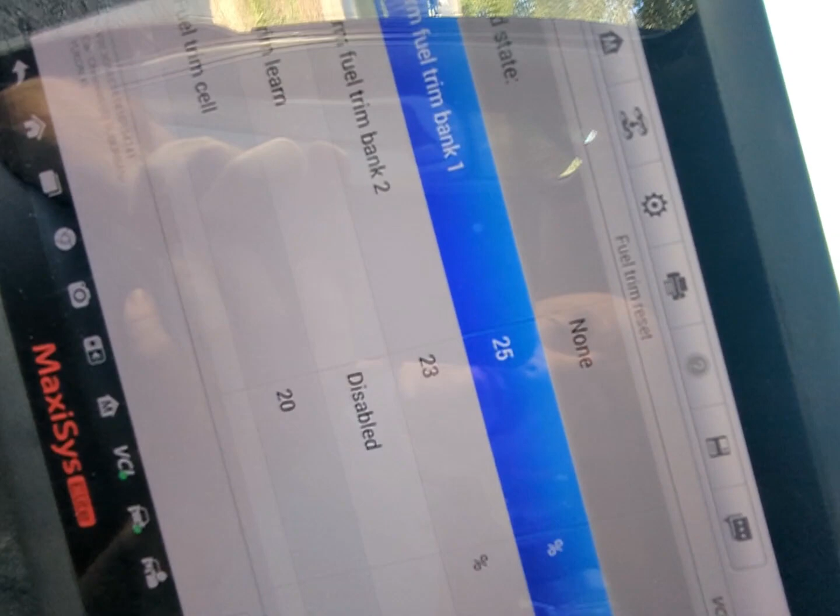Enjoy. All right, I'm going to try to reset the fuel trims on this bad boy. The ALDL doesn't crap out on me—the assembly line data link is messed up on here, so we're going to reset this.

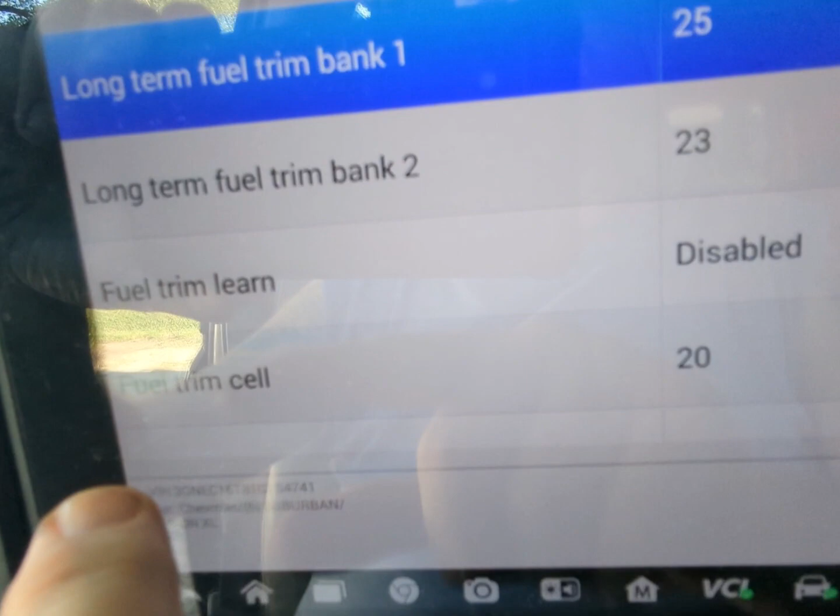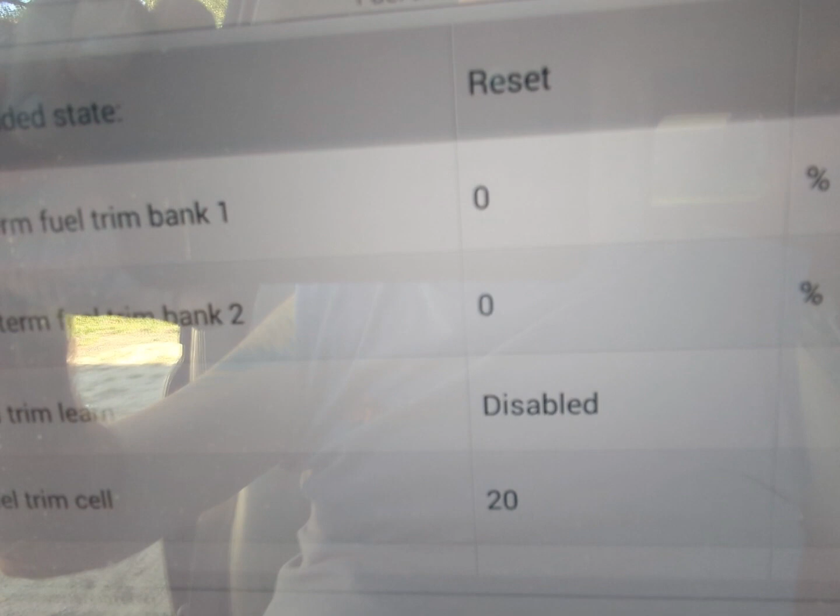Our goal is to try to get these long-term fuel trims back down. Both of these long-term fuel trims, we want to get these to 0. We're going to reset them and set these two back to 0. This is what we want to do. Okay, all right, they're at 0 now. Now we're going to escape.

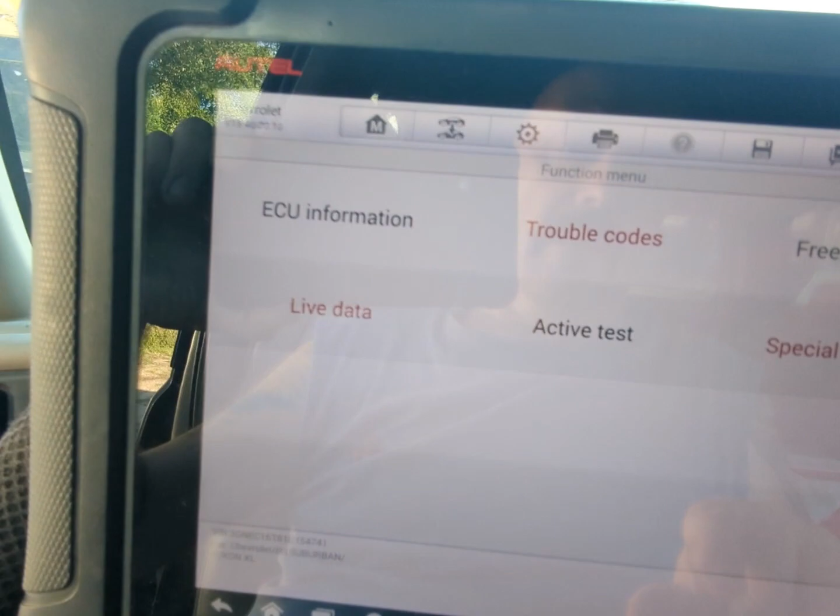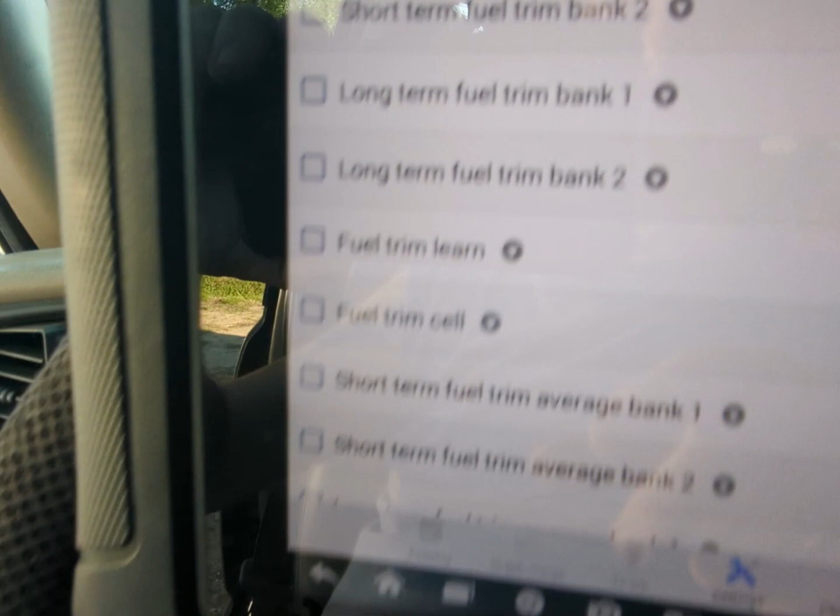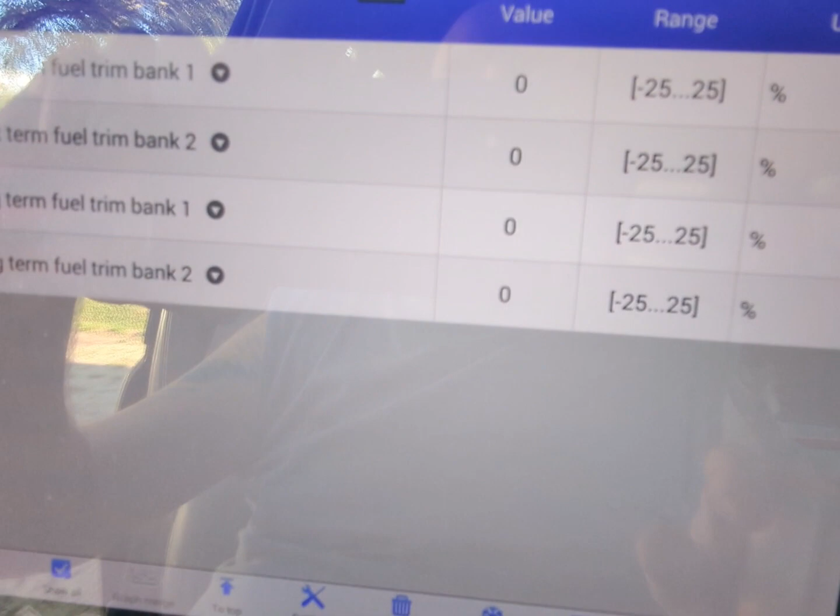Then we're going to take a look at the fuel trim. Let's just stay right here—live data, engine live data—and we're going to look at the fuel trim data. The car's not running, it's sitting here at engine run. Okay, all our fuel trims are set to 0. We're going to hit these trims here, and this is what we want to see. We want to see these fuel trims and watch what happens when we start the car.

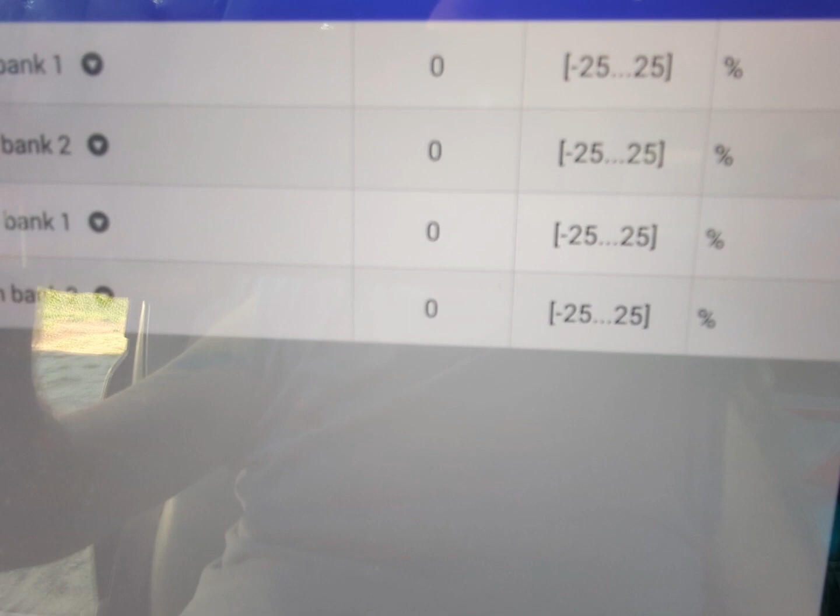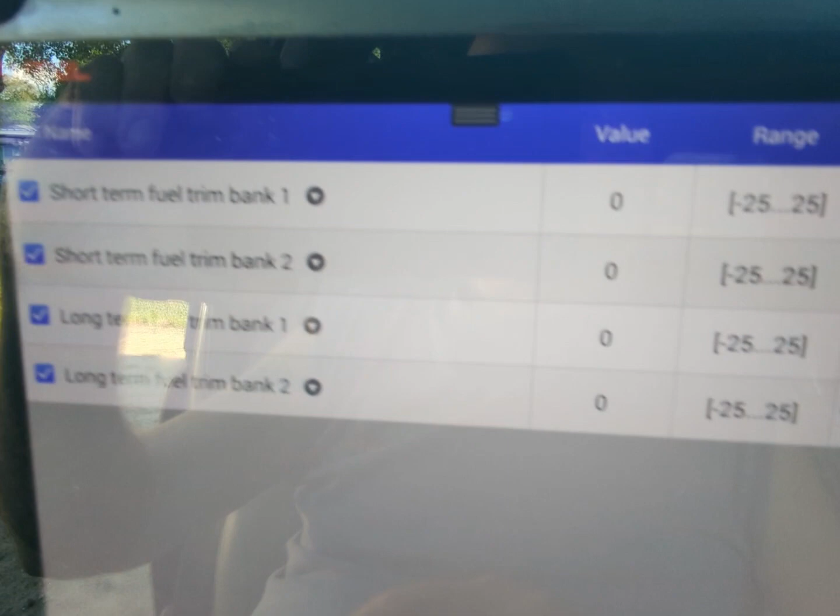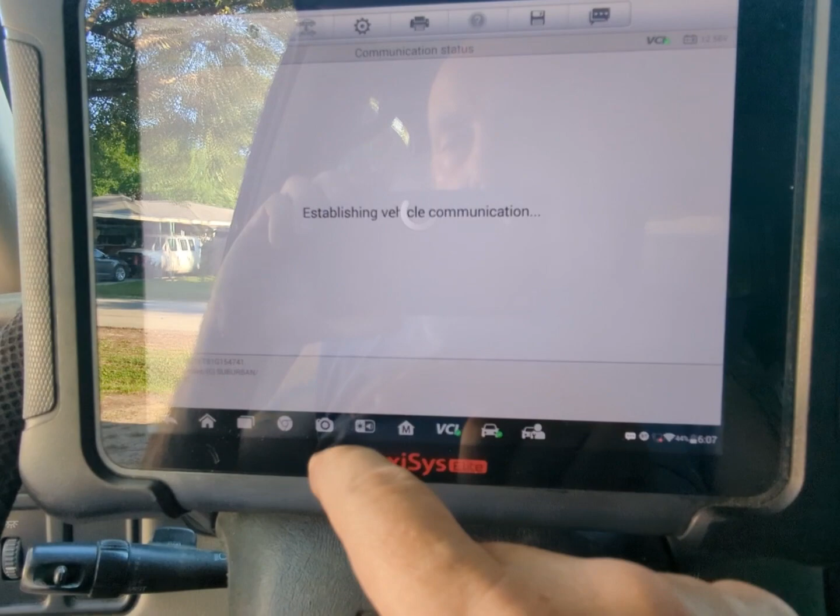So here we go, we're going to start it. Let's see what the fuel trims do. Hang on a second, I want to do something else here. I'm going to go back and see if I can look at the closed loop. Where is she? Fuel trim. These guys—I want to see if we can see a loop status.

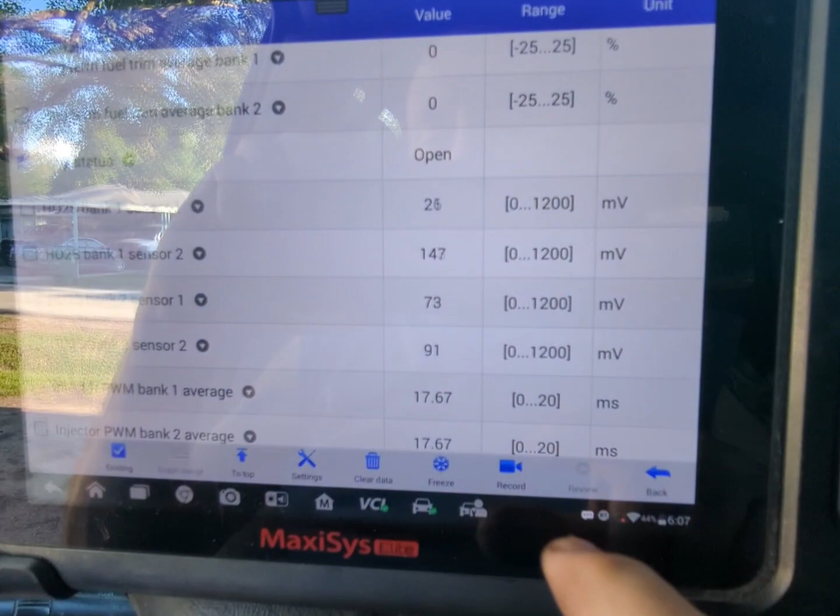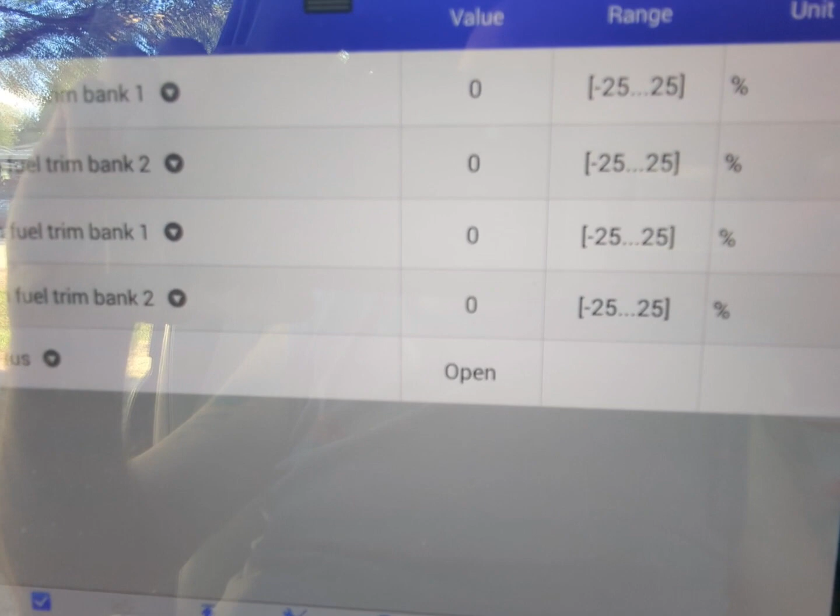Loop status is open. Now this is what we want to see—the loop status. Right now the engine's going to stay in open loop until the computer feels ready. Once she goes into closed loop, our fuel trim should take over. We're going to see if our long-term fuel trims start climbing again.

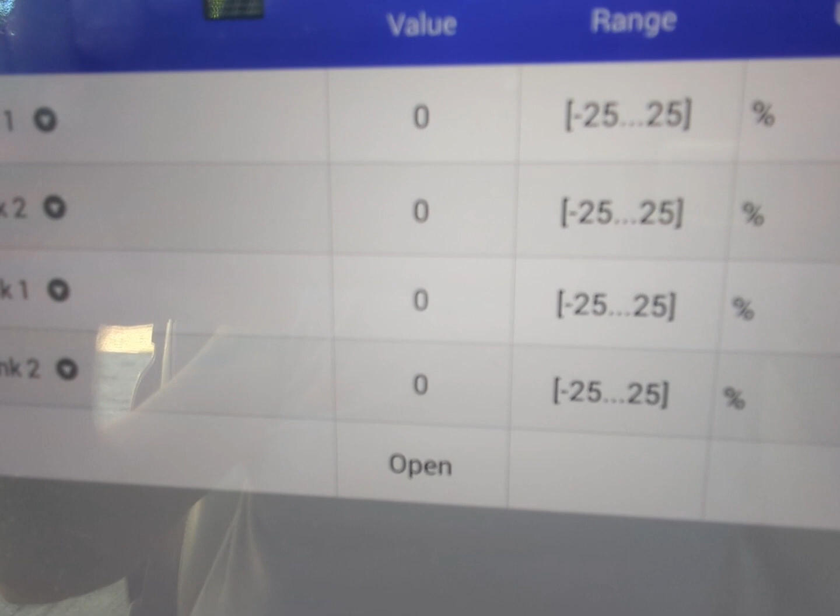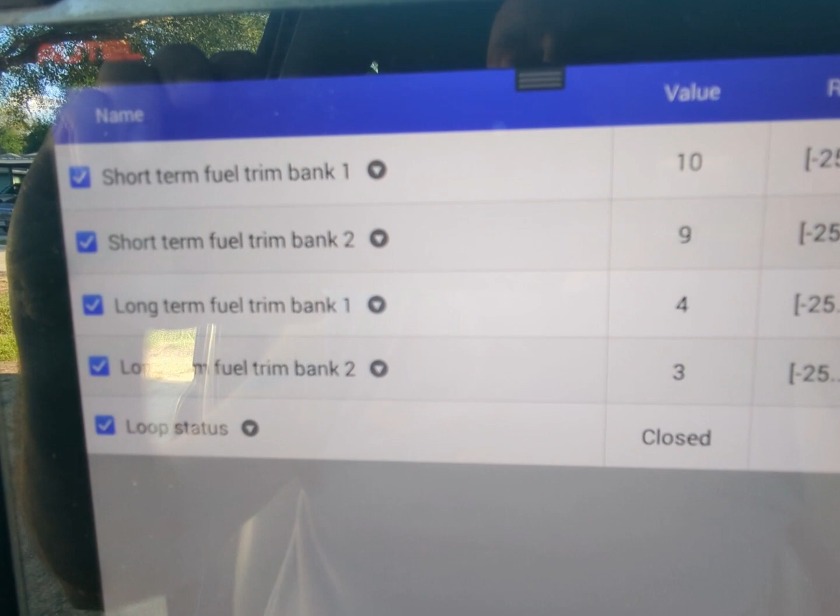Let me give a little gas. There, she's in closed loop. Let's see what our fuel trims start doing. These are our long-term fuel trims, the short terms on the top. Short terms are capping out, so long terms are compensating.

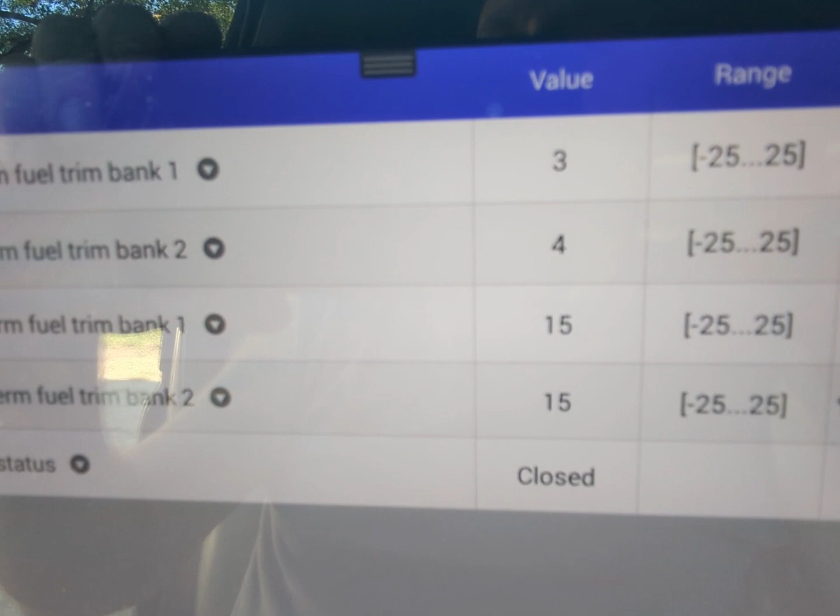Well, they're not capping out just yet, but long-term fuel trim is already starting to shoot up. So we've definitely got something convincing that these oxygen sensors are running lean. Let's see, we're at 15, 16, 17. We're going to cap out at 25 again.

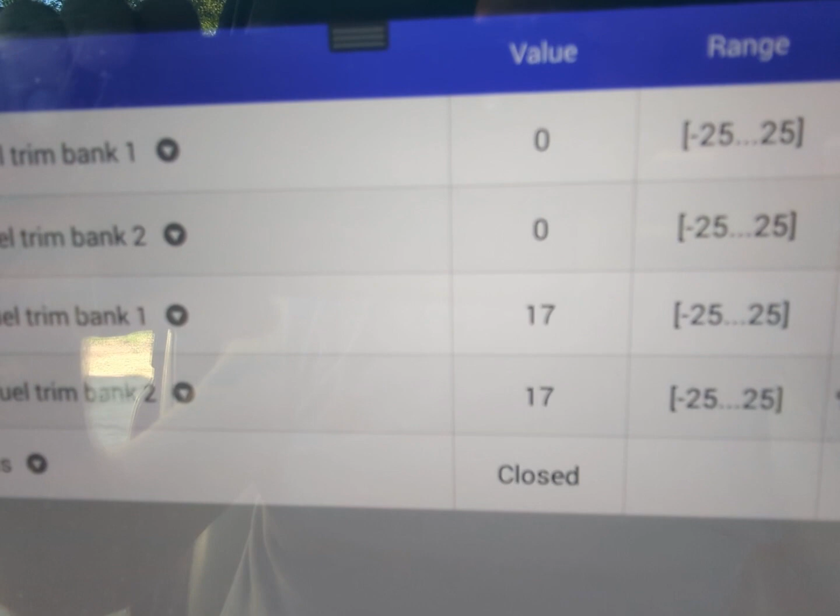Let's give it some gas. This is in closed loop. Fuel trims are trying to stabilize long term at 17. Okay, here we go, 21, 20. All right, boom, and we're going to cap out.

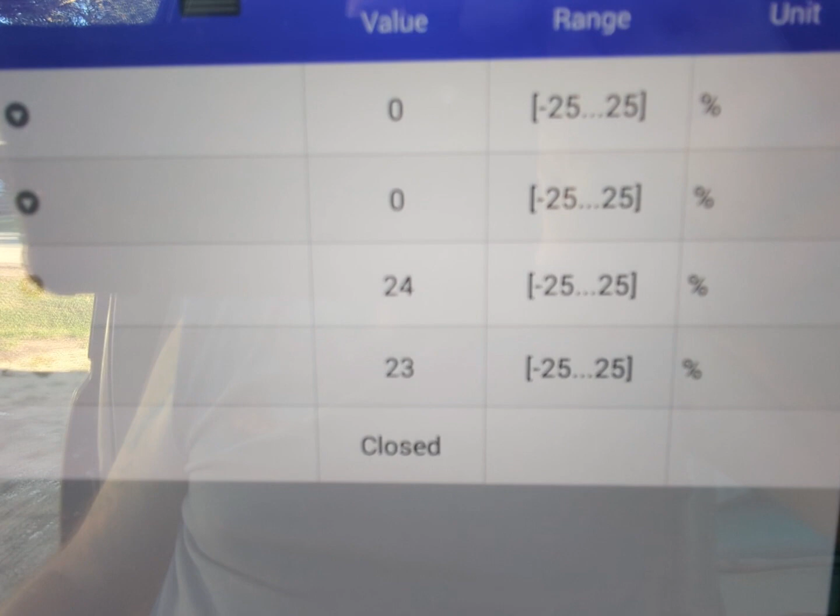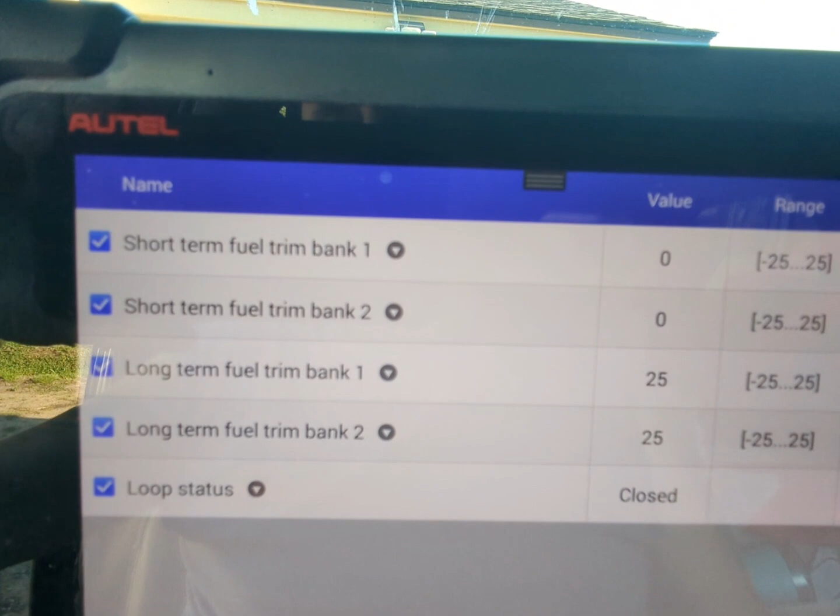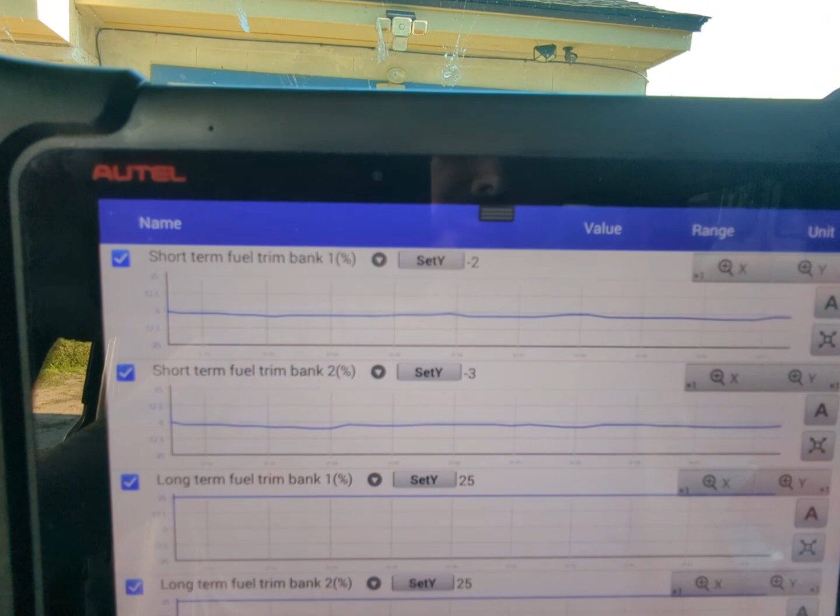I do hear an exhaust leak, so that may be contributing to these fuel trims going crazy here. Yeah, they're capped out already now, so we're gonna look at the graph. Just slow them down a little bit.

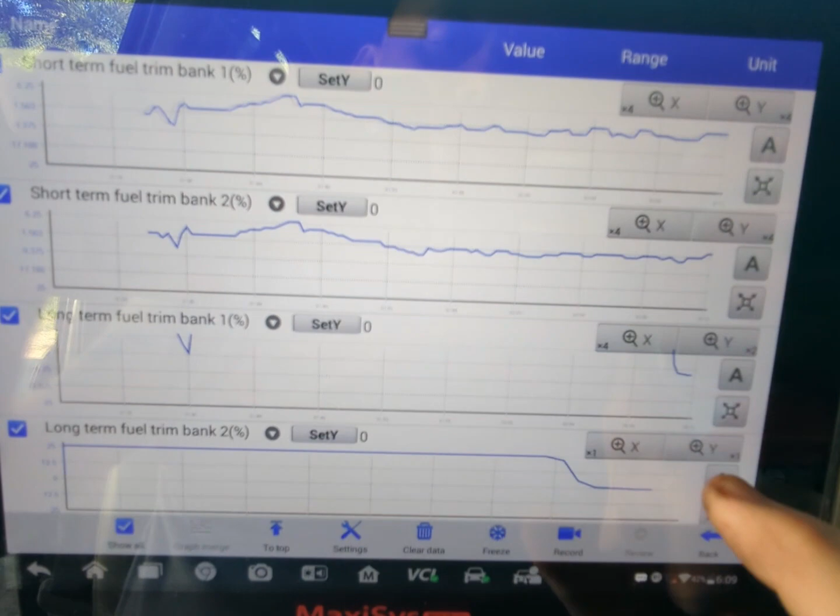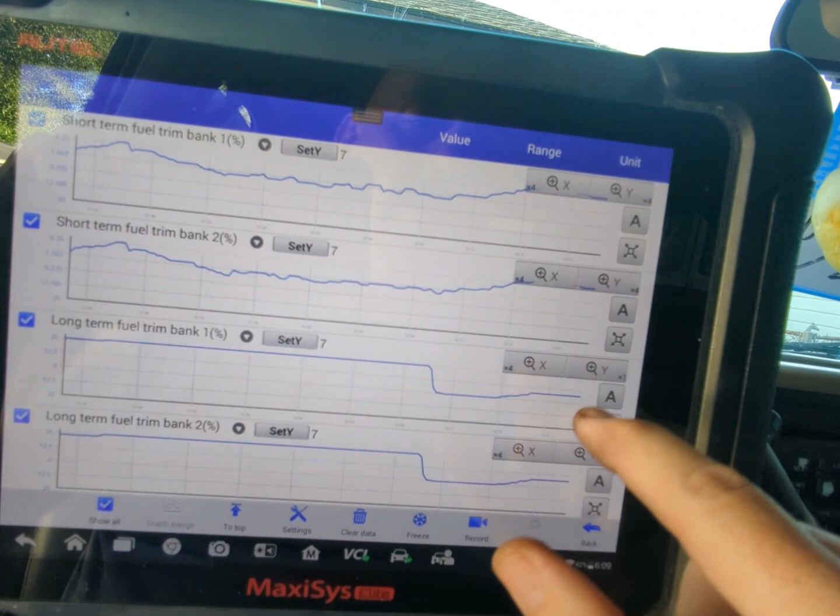Put this back. This must be long-term fuel trims. Okay, we're looking at long-term fuel trims at 10, 11. Short terms are trying to climb. Let's reduce these back.

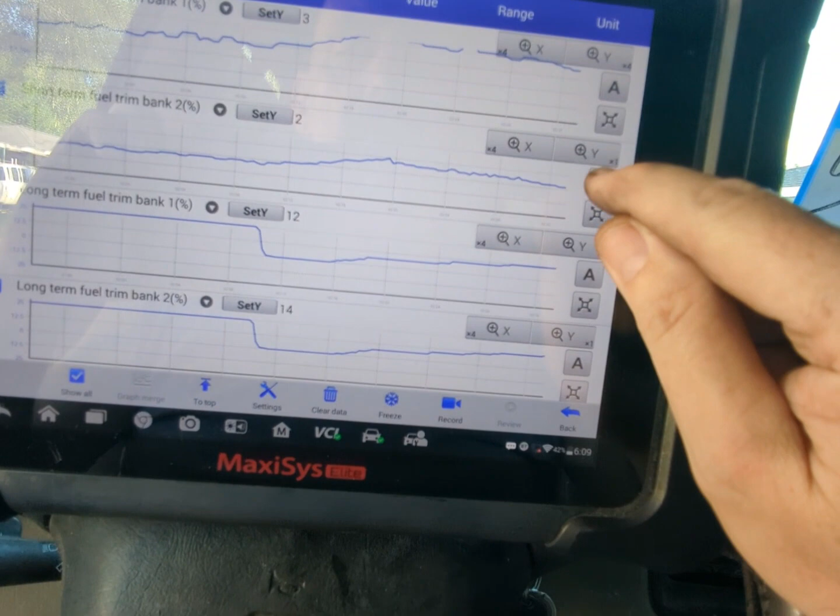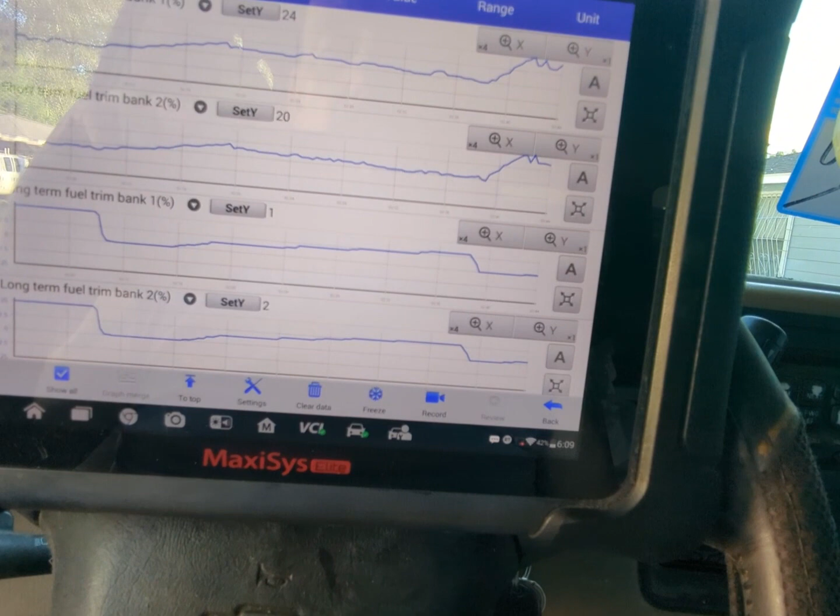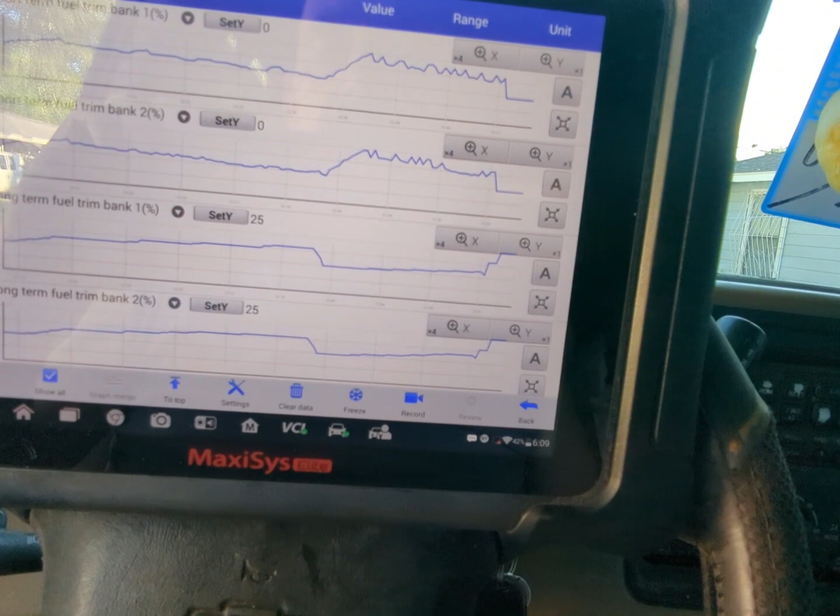Now long terms are at 0. I'm thinking this may be a mass airflow issue. And they cap out when we go back to idle. Let's see if we can take a look at the mass airflow real quick.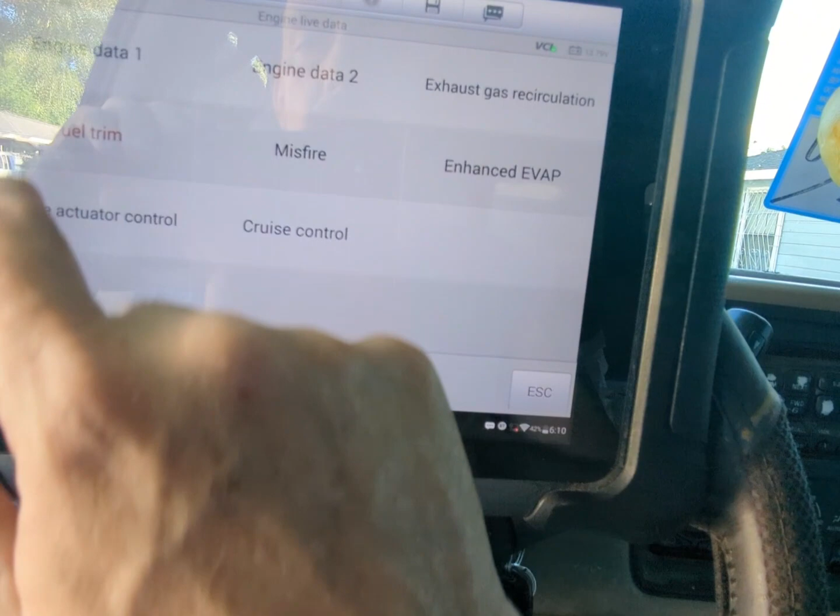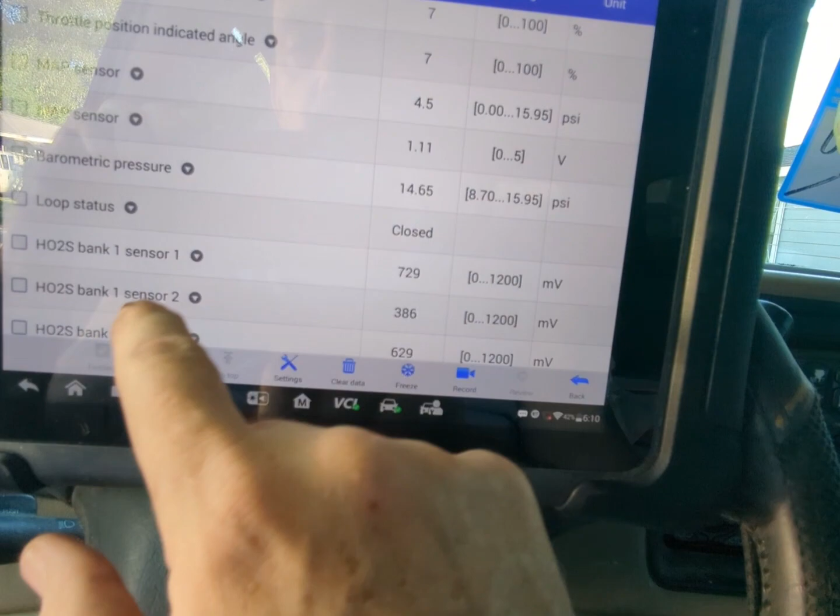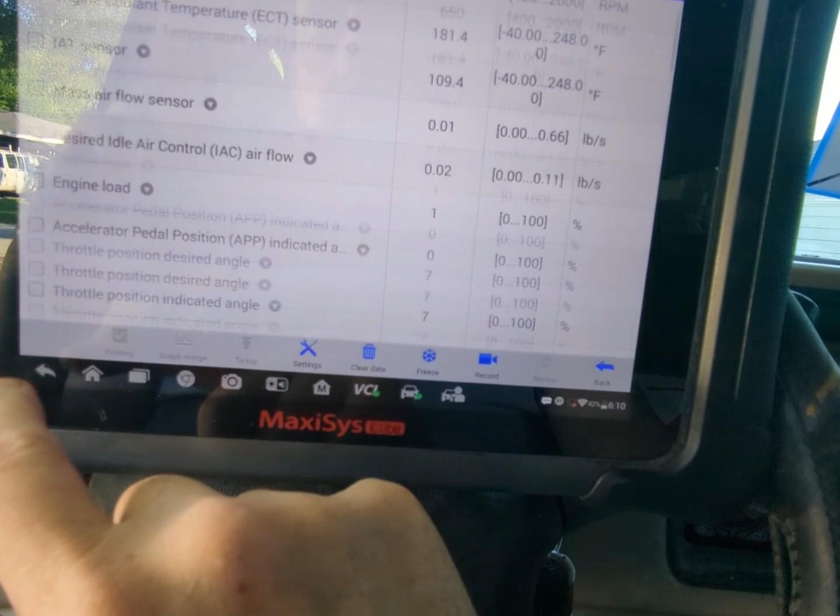Let's look at engine data. Engine data 1, so we can find mass airflow on here. Let's see, we got MAP. Okay, so let's go look at engine data 2.

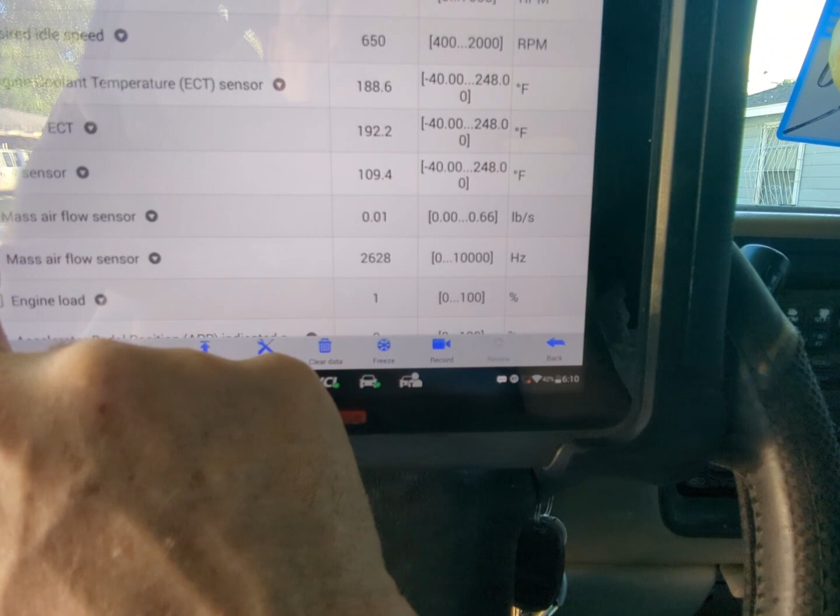Started, and there we go, mass airflow. Well, there's one issue right there. Mass airflow should be, for measuring, let's measure these in grams. That'll be better.

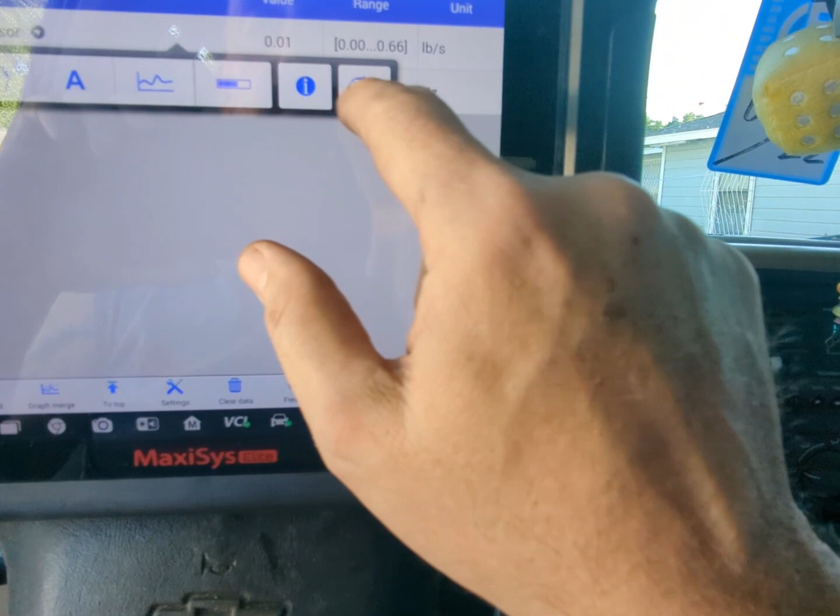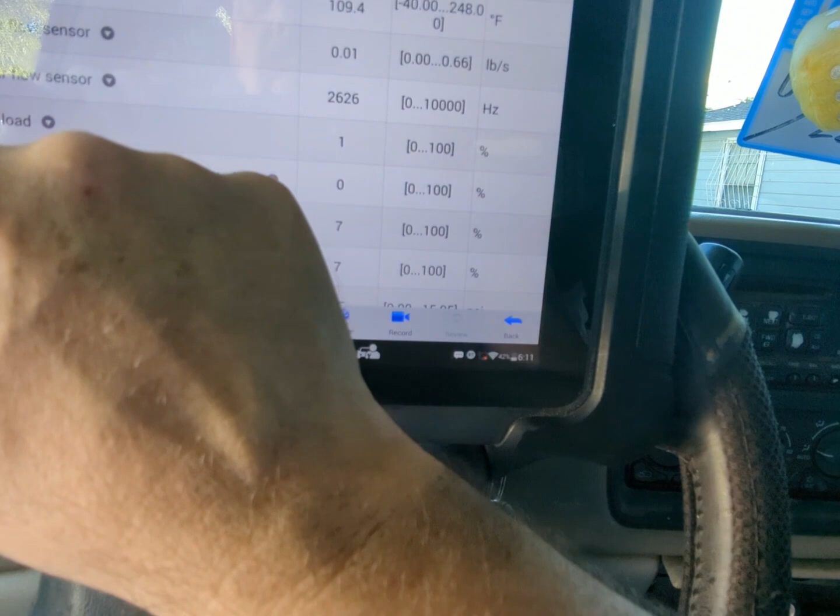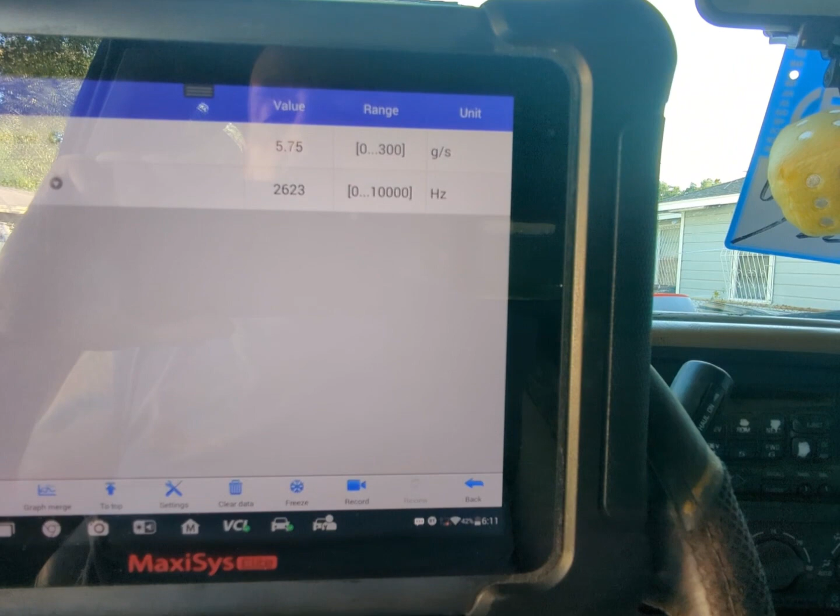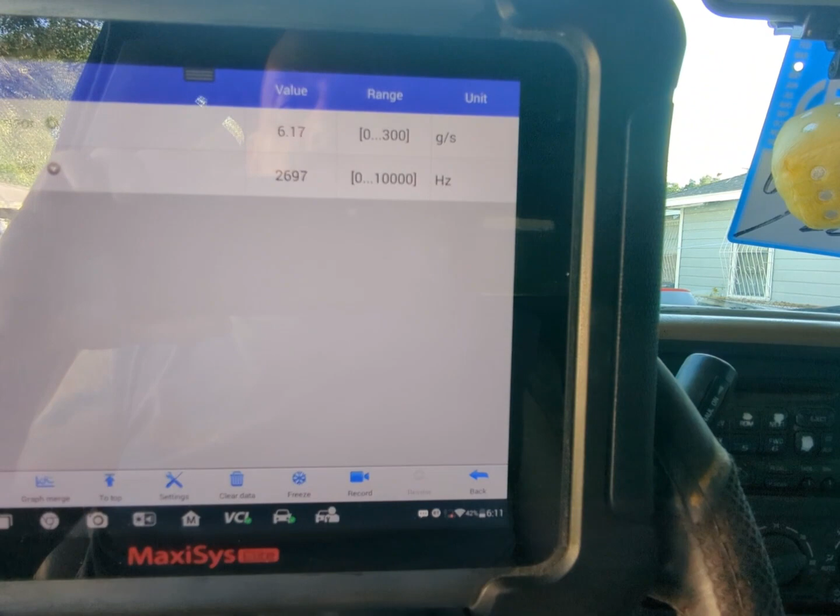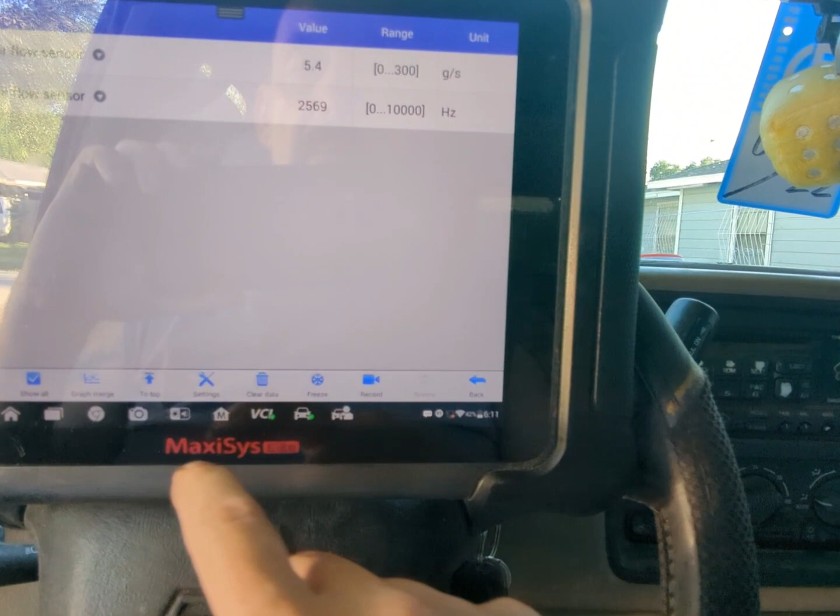Okay, let's go back. Back. Okay, great.

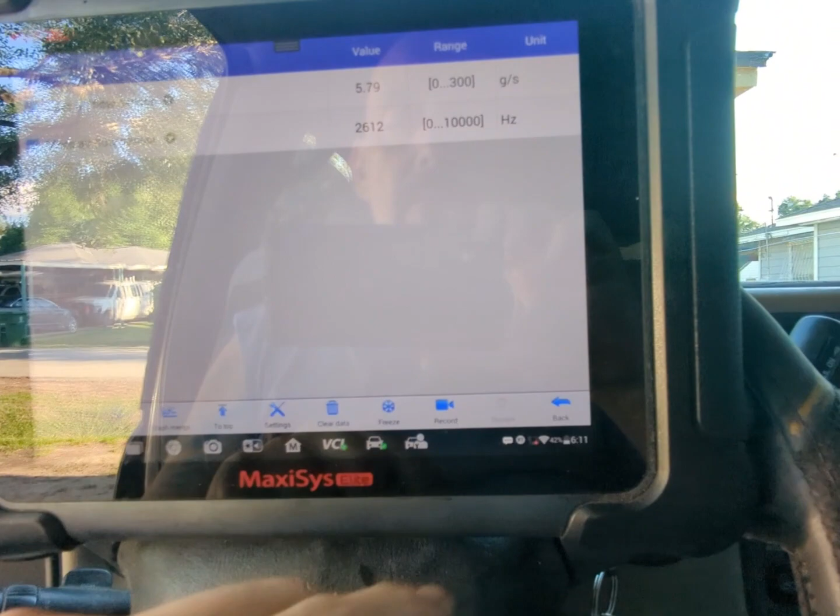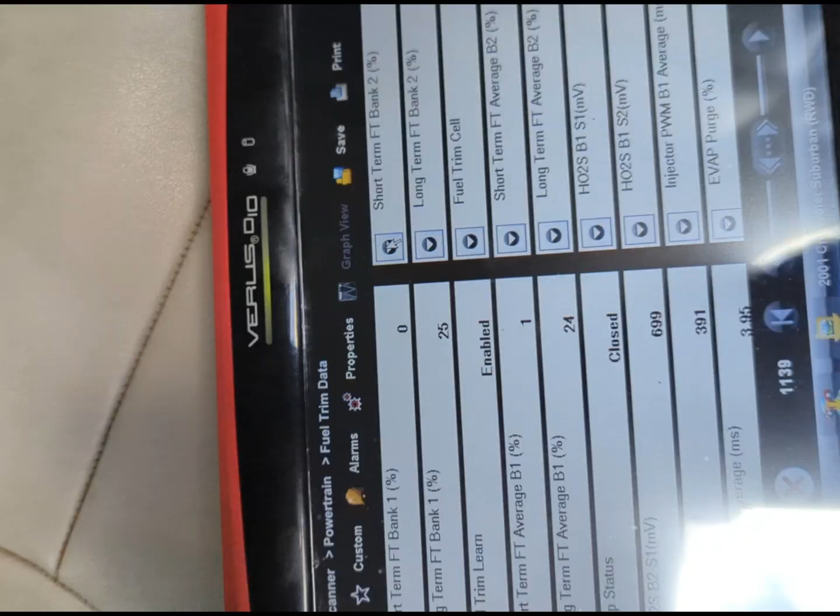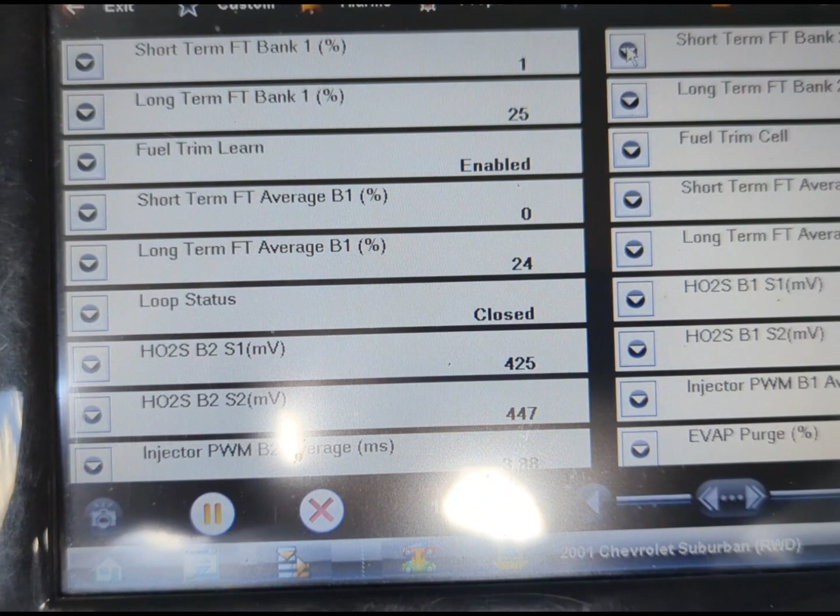Awesome scan tool, this is just great. Also wanted to show you right now, here's the short - these are percentages without the oscilloscopes on, to where you can see them - but also your loop status is in closed loop right now, and you're running a very lean engine. I'll see what I can do about resetting that.

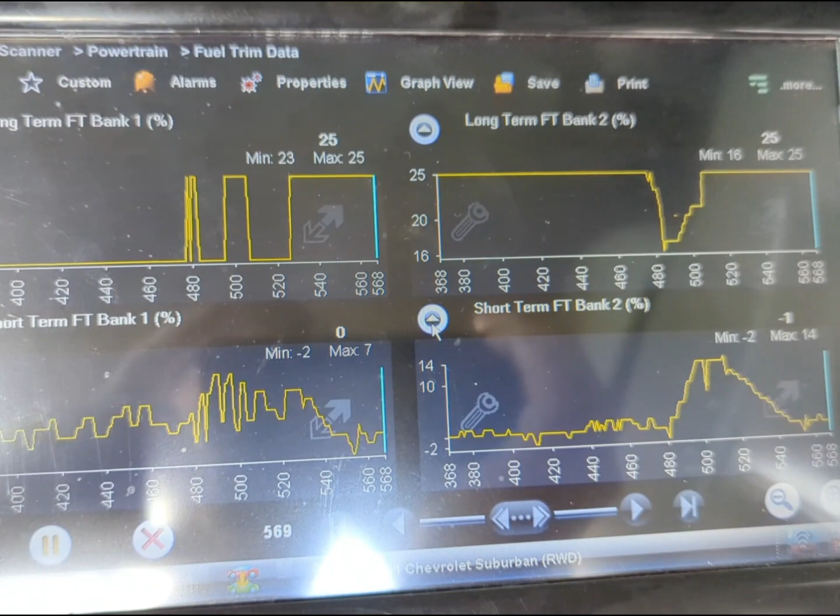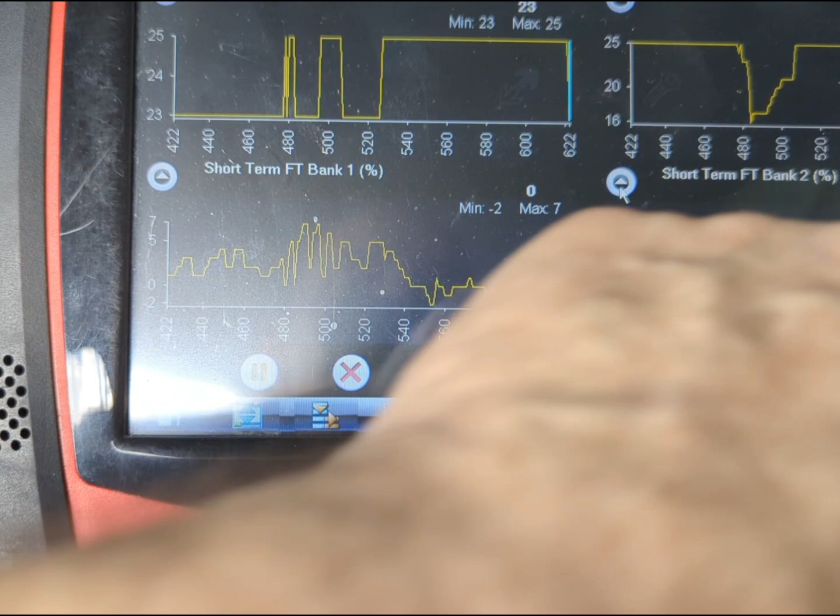Alright, I'm going to show you right here what we're looking at. Right here, these numbers, 25 and 25, you're maxed out on the long-term fuel trim, which I'll try to explain. These are your short-term fuel trims - as this adjusts, it adjusts this. But you can see right here, your oxygen sensors are working. So don't think that you need 4 oxygen sensors.

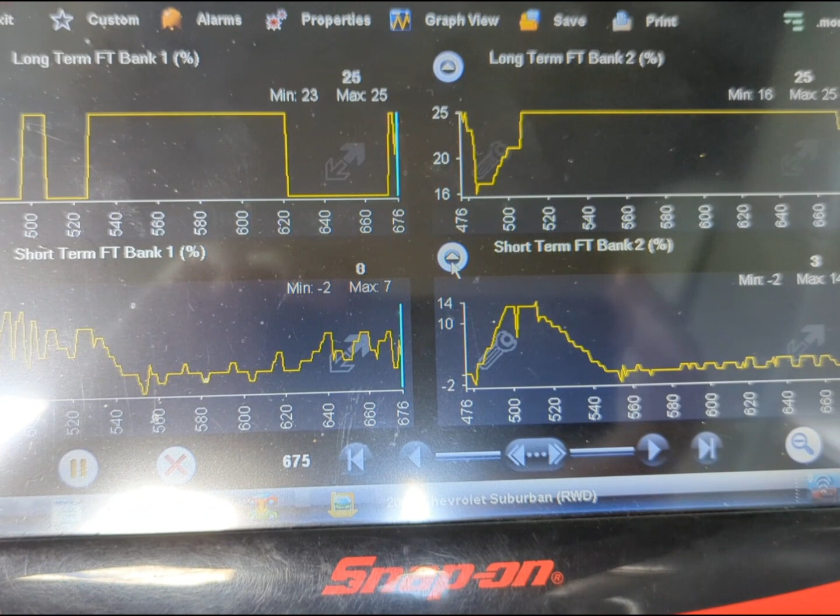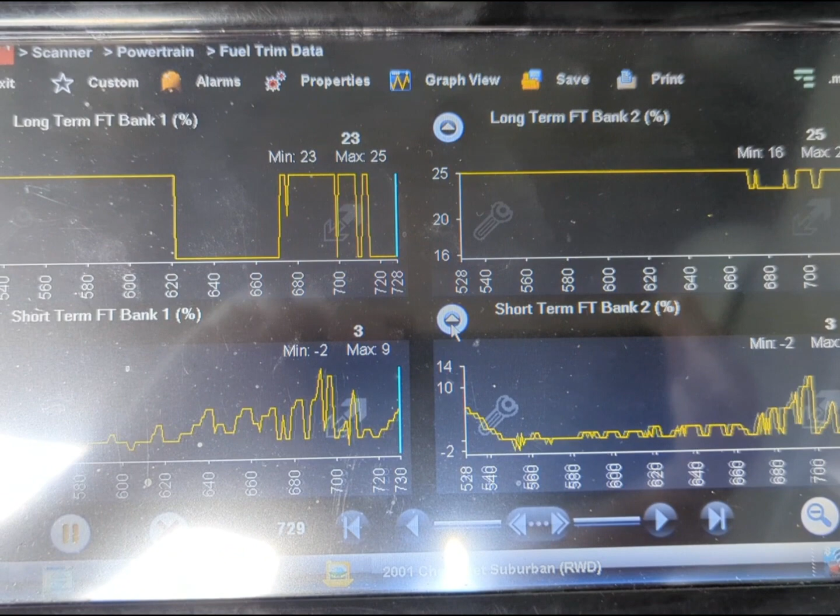I'm gonna give it a little gas, and you'll see it change. Your fuel - see, you've got a lean mix. Something's going on there. It could be injectors, it could be mass airflow, it could be a number of things, but your oxygen sensors are working, and we need to try to get these long-term fuel trims down.

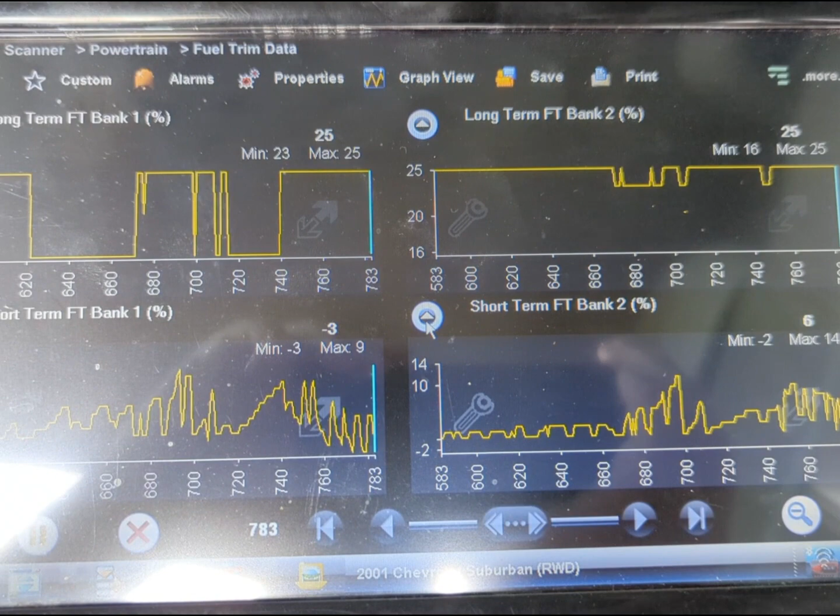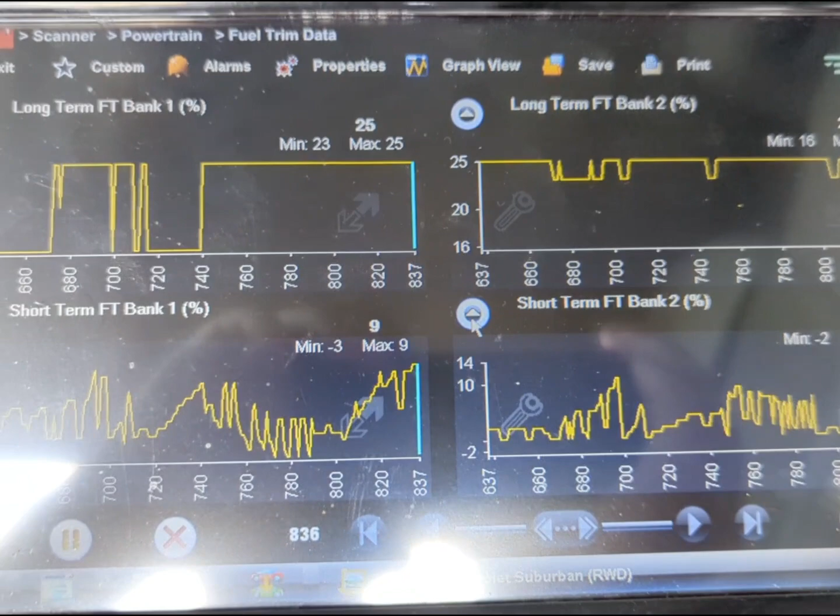They're staying at 25. They're not even trying to adjust. And your short-term fuel trims are at 0, which is expected with the long terms up that high. I can try to explain this to you, but I wanted you to see that you don't need oxygen sensors - they're doing their job.

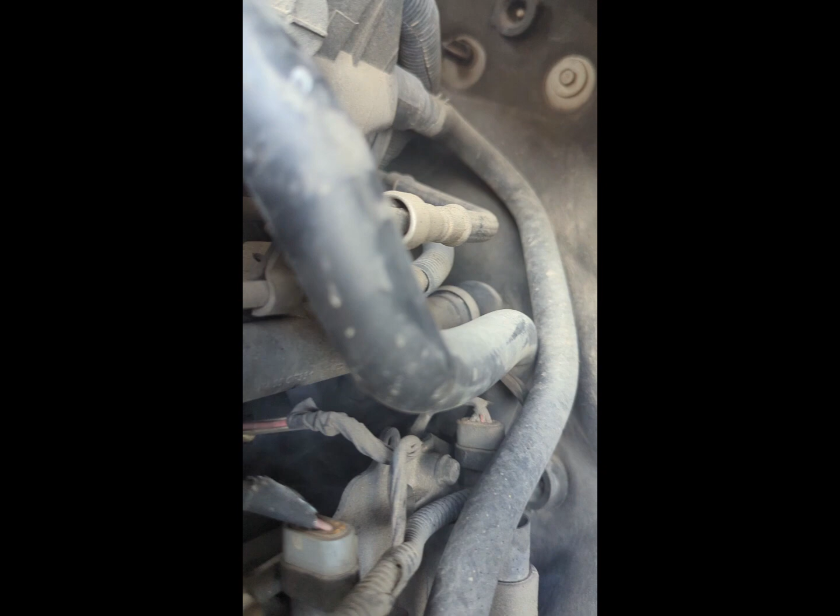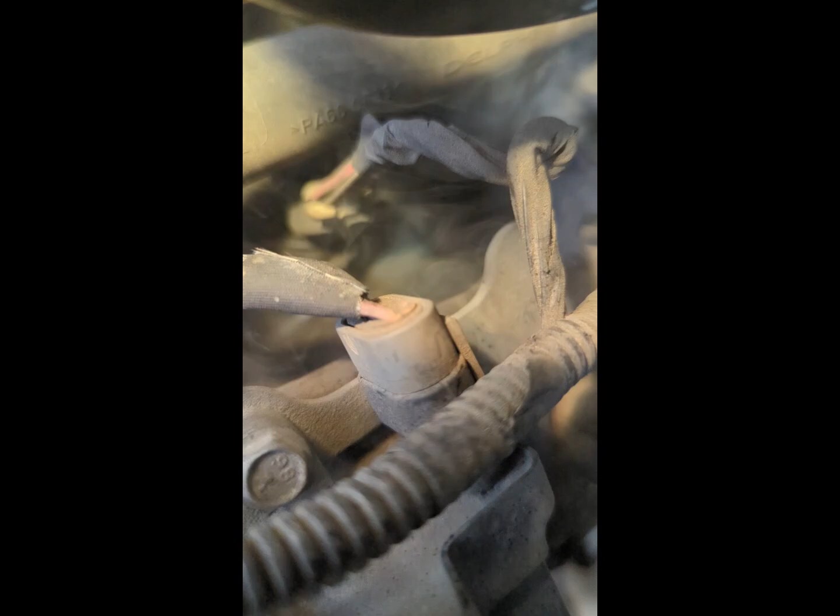Now, I don't know if we got the first one. We definitely got an intake leak on both sides of the intake. Got them over here, smoke pouring out between the engine block and the intake. This thing is capping out on long-term fuel trims at 25. Short-term fuel trims are trying to stay zeroed out, and they're doing pretty good, but both sides of this intake are leaking smoke, a lot of smoke.

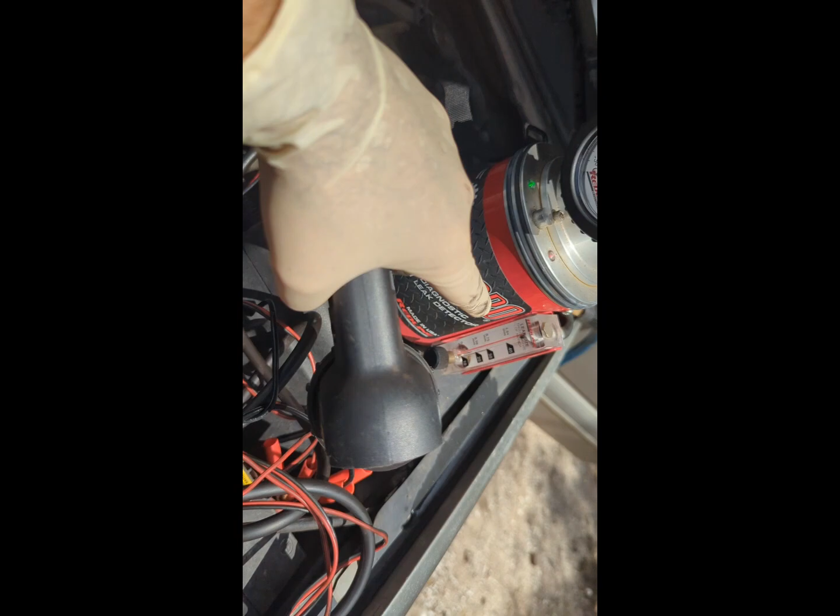So what we're doing here is we have a smoke machine on here - if we see pressure building up in here, it means that it's holding pressure. If we see the flow meter drop down on here, it means that everything's nice and tight here, but we do not have a nice and tight engine.

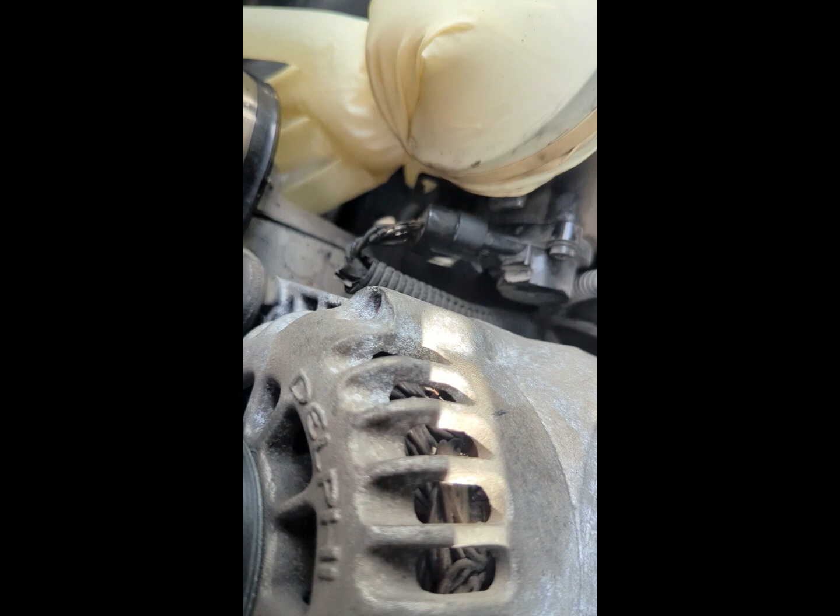Also, the wires going to the throttle position sensor here need a new connector put on. This connector is nothing but broken wires and oil soaked, cracked sheathing. We had a problem with the OBD2 connector.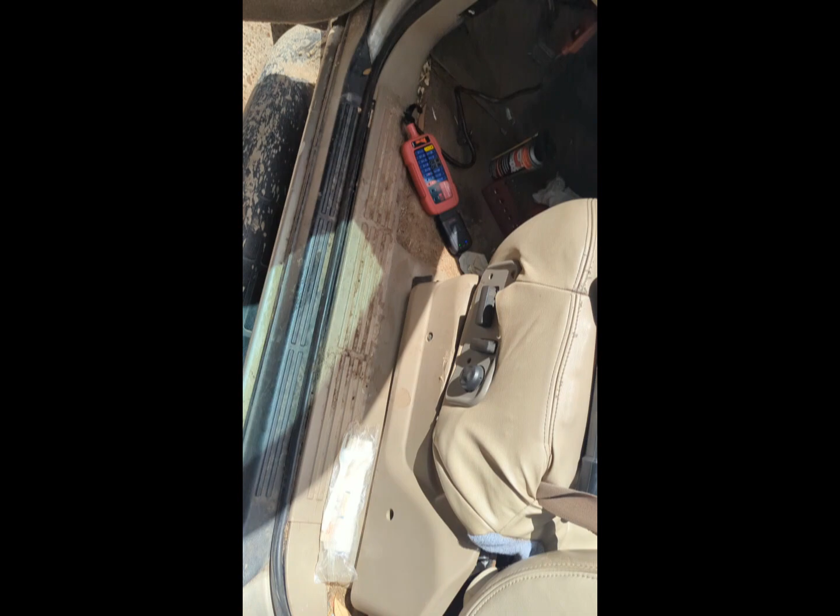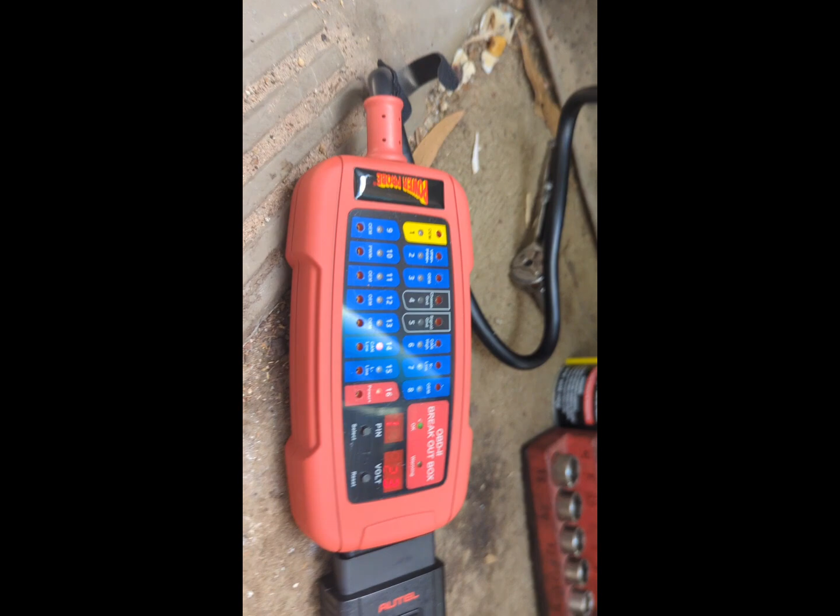Pull it down. Basically, I think all it was going to be is that it actually just needed to be cleaned up, because now I've disconnected it and hooked up a breakout to it just to see if I've lost any communication on anything, and it seems to be pretty good.

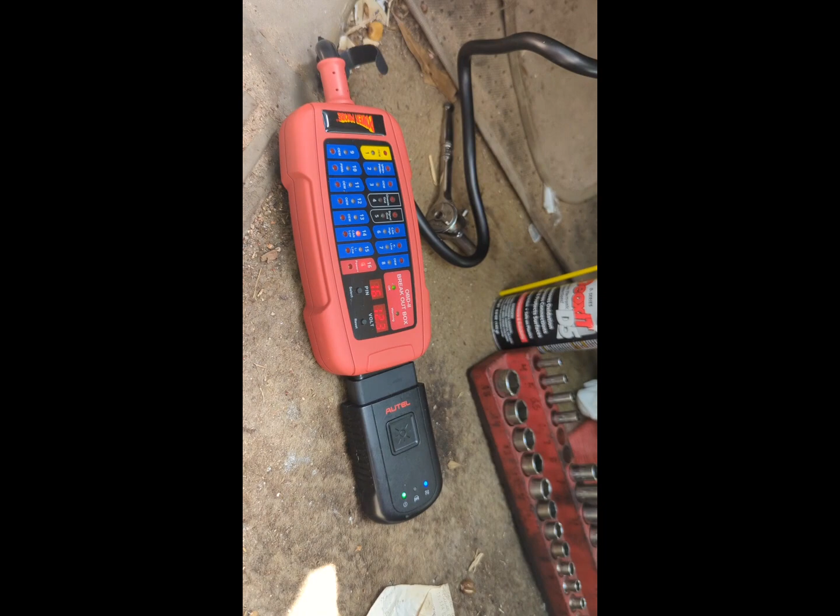Before I plugged my OBD2 Bluetooth VCI in here, I had to put something underneath this brake pedal to push it up to make it stay on, and I don't like doing that to my scan tool, so we needed to fix this first, but it looks like it was just dirty.

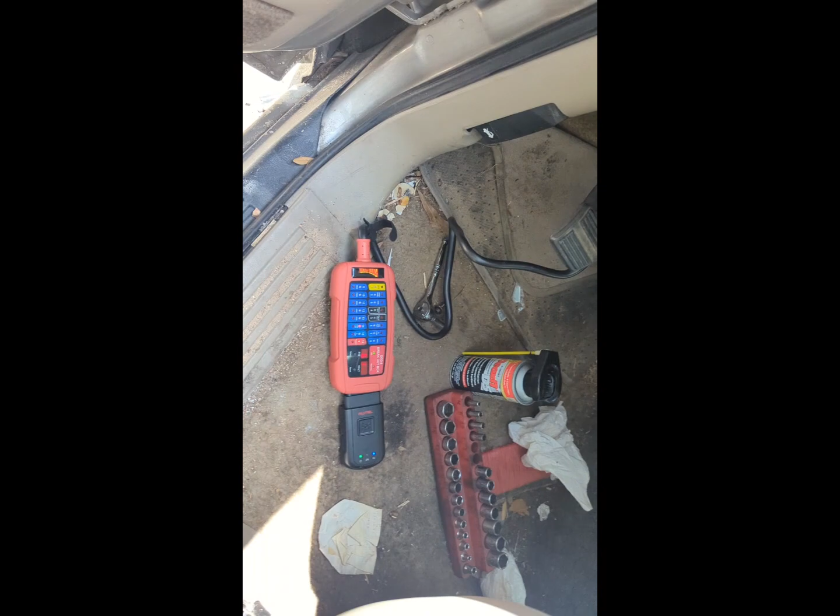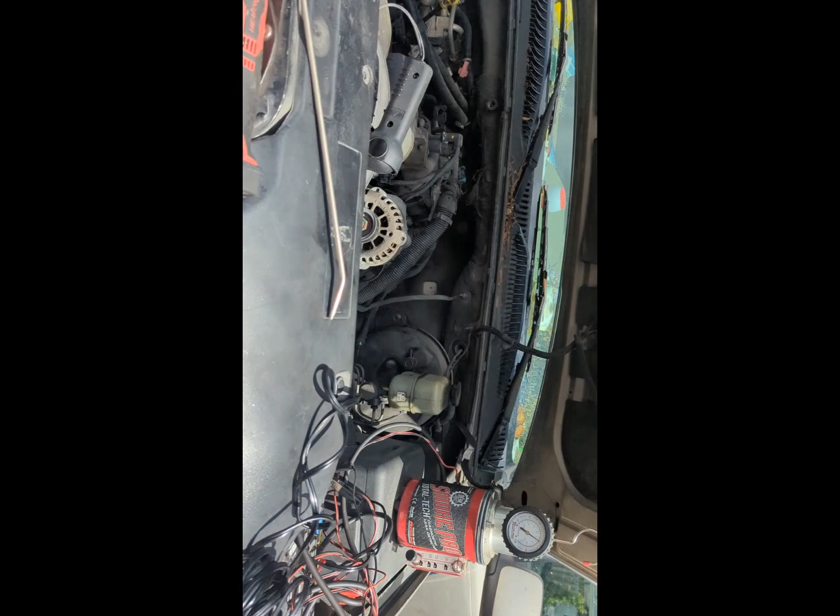So far, that's the problems I've gotten. We've gotten a lean code mix, of course, banks 1 and banks 2. We've also got some type of terminal ground issue off of the alternator, which may be just something going on inside the alternator. I need to try to do some locating on that and see what's going on here.

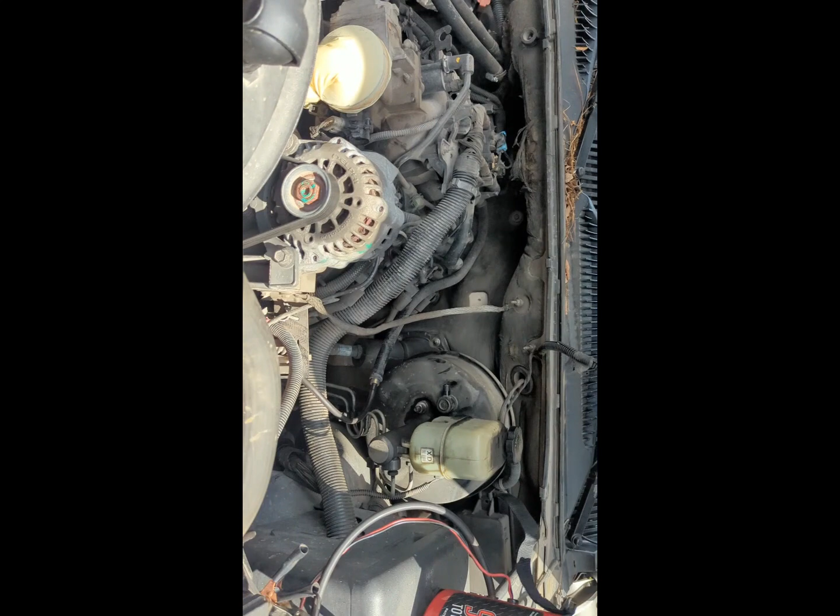But anyway, there's your smoke leak, your vacuum leak. You need a new intake and gasket. And as far as the wiring goes, I think we're good.